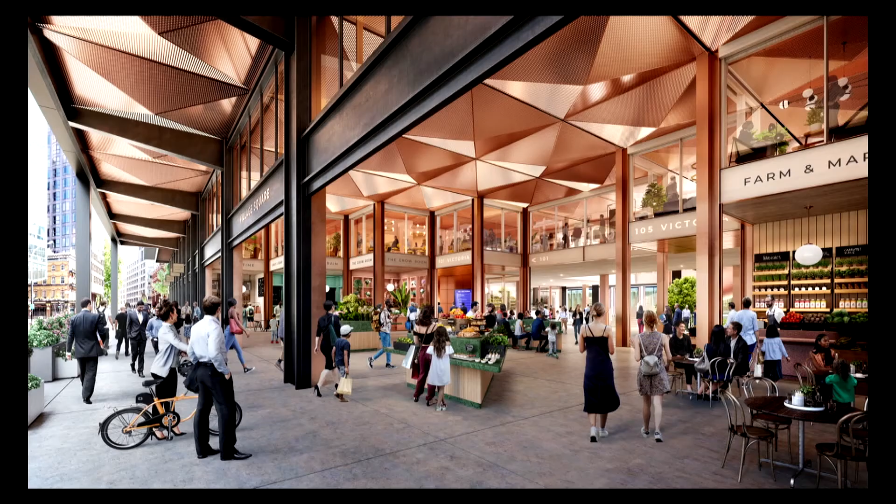This is 105 Victoria, which is going to be driving towards a carbon neutral building. I'm showing this because it is very much designed between London and New York, with senior and junior people on both sides of the Atlantic. It is really quite difficult sometimes to get to this level of quality if you're not in one room together. So how can we look at the future and how can we make that go forward?

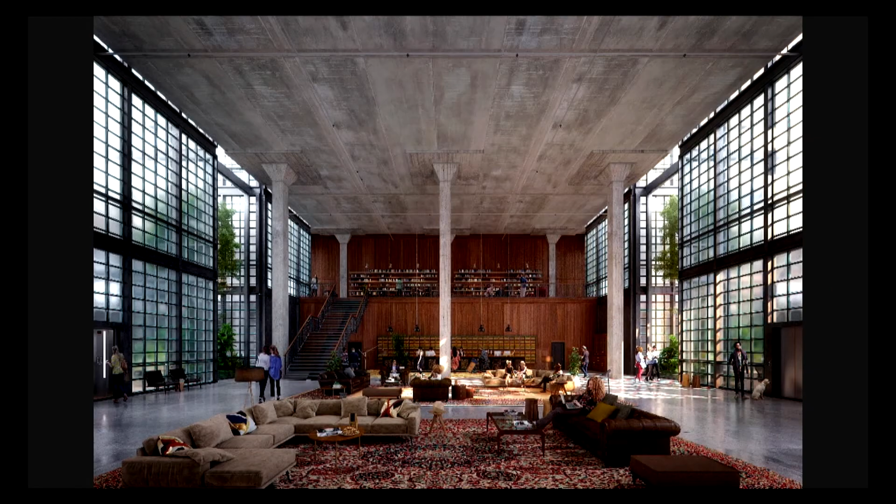Another project here, Bermondsey, recently received a MIPIM award. Same kind of concept - a collaborative design process with multiple people from all over the world involved. And again, going into details and looking at the detail aspects of those buildings, recycling the buildings and the likes.

A little bit about the back end of what we've done over the last 20 years regarding technology at KPF. I just want to highlight 2 items. Around 2003, we became a global company as such - we have 9 offices, but we really work across the globe as one network, so we dial an extension and speak to someone in Hong Kong, for example. The other aspect is around 2010, where we started disintegrating or disbanding our specialty groups and put the focus on the designers. So whatever we do, we're trying to get to a designer's table or a designer's desk as such. This is very much what I'll be talking about as well.

I love visualization, so a little bit about some of the visualization we've been doing - you can see from a technology point of view, sort of 2018 onwards, when things started ramping up on that aspect.

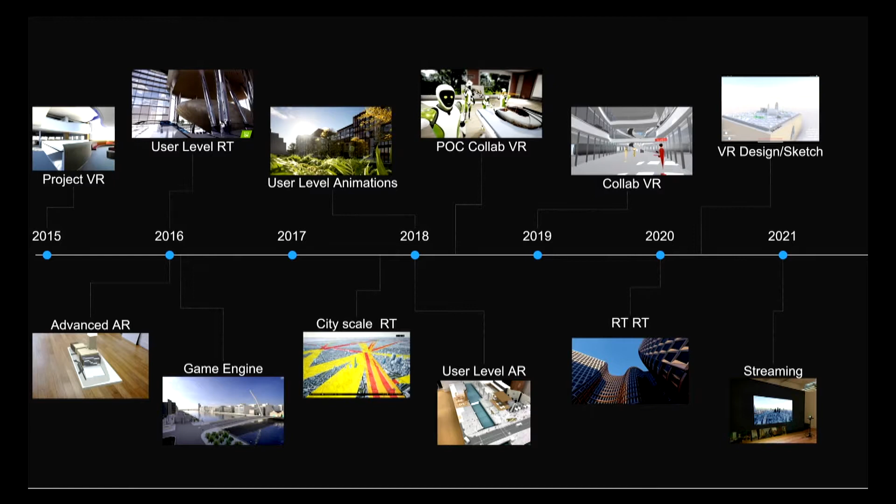Just a bit more - our technology group globally is about 45 people. It spans different disciplines: infrastructure, digital practice (which is the BIM, computation, visualization people), urban interface, environmental performance, data science, and then I sit in applied research. We really work across the boundaries - there's not siloed entities as such, this is really a global approach to how we do it. The focus is from the outside really in towards this digital practice, UI and EP side of things to empower our users.

So today I want to talk to you a little bit about some aspects of location independent design and what we can look at towards the future possibly.

I said we have 9 offices across the world, dispersed all over, and it's quite challenging when we have to share files and the likes and be immersive. Now, of course, we have 750 plus independent small offices that we cannot control, and we cannot always control the hardware that these people are working on as well. Which brings to the aspect that we were looking at, before the pandemic, a very much global private and public cloud approach. But it was very much in file sharing and data sharing as such.

It wasn't really in terms of the compute. What has happened recently is that we have moved a lot of these functions and started building compute servers - geometry compute servers, as well as visualization compute servers. We are trying to see what we can do on the cloud side, move the compute away from where we can't always control what the user is doing, and see if we can compute in the cloud and then get the information back to the user.

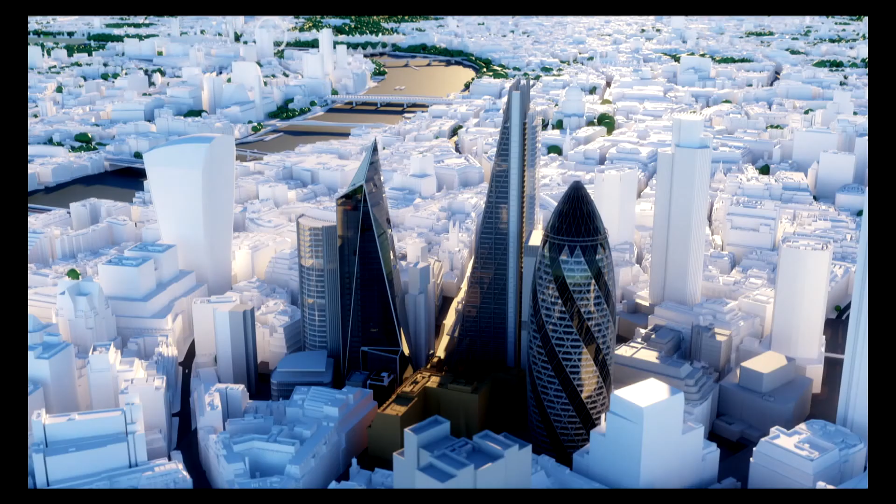So how can we get a BIM model with Rhino models and about 40 square kilometers of London at 150 mil accuracy in front of a user where we can't control the hardware? That is the kind of spot challenge. And can we have that running live with them when they make changes?

They can actually get the visualization live out of that. This, incidentally, is running path traced, so it's not a rasterized rendering or any optimized rendering. There's no time spent optimizing this model, and I'll delve into that a little bit.

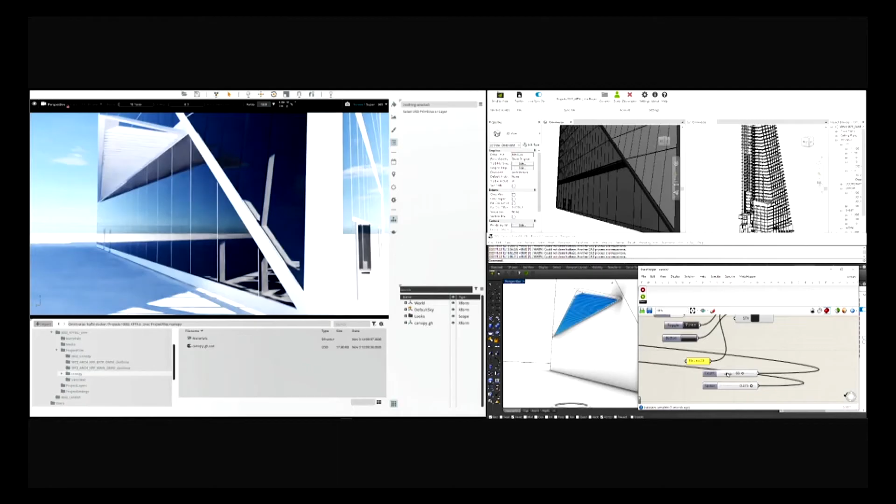One of the applications we're looking at, like a few others, is Omniverse. This is one of the ways we're doing it, definitely not the only way, where we can have two Revit models open and a Rhino model feeding a central visualization model to the users. This requires some backend setup, and this deals both with remote compute in terms of geometry, as well as remote compute regarding visualization.

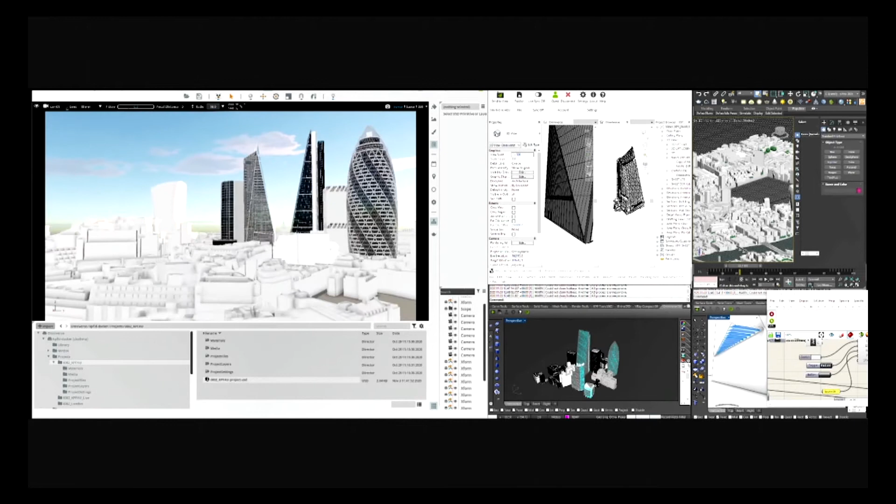It is not a small model. This is probably capping out this 24 gig graphics card, but you can see the entities are pretty real time, running pretty live. The instances on the right are on a different machine to the ones on the left. I've just cropped them together to show you the kind of quality you can get.

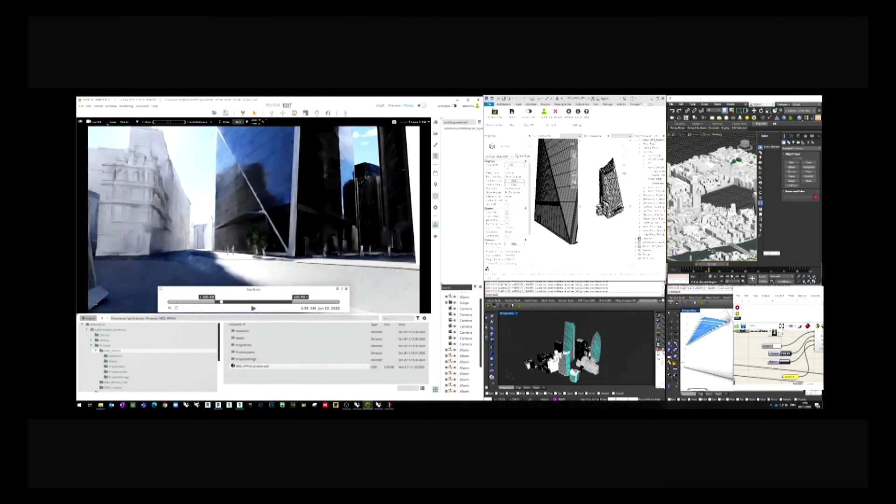This is really what we're aiming for. Again, this is a BIM model at DD phase where the user can open this and visualize it in really high fidelity and high quality.

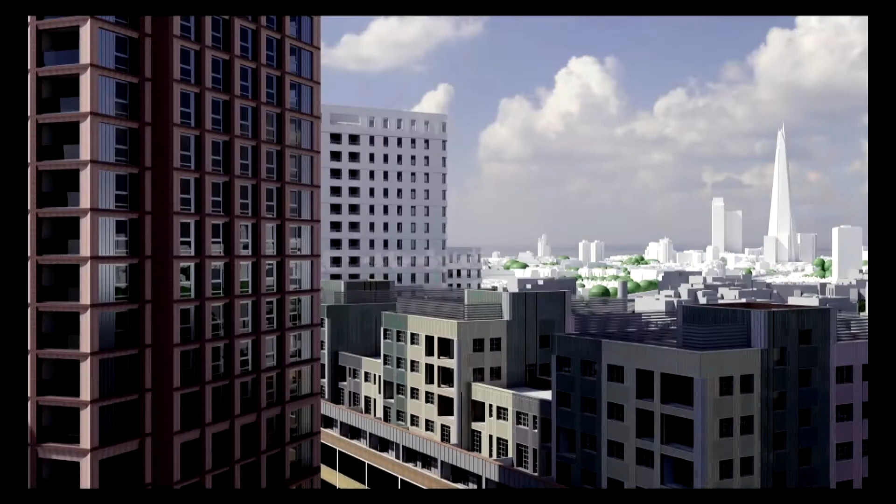And then more recently what we've done, there's again three multi-BIM models — I'll talk about three or four Revit models put together, no optimization — and this is a direct feedback from the Revit models that we can feed to the user wherever they are in the world.

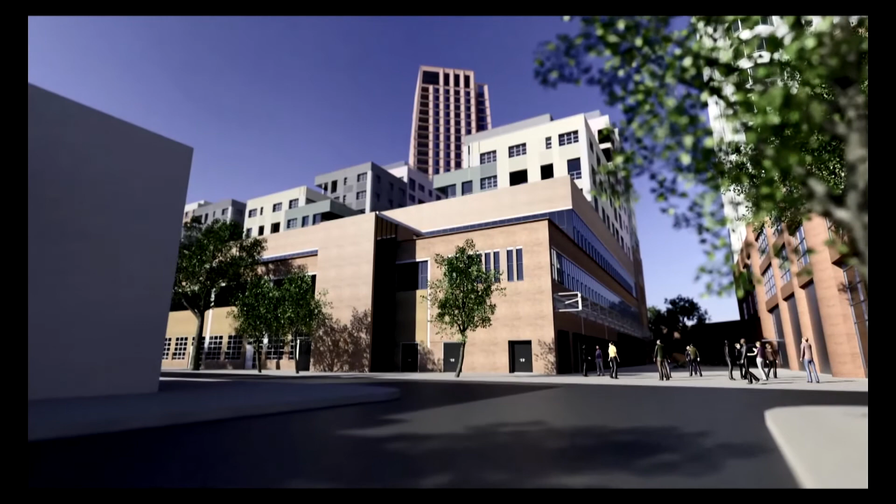These are animated. I just put parts in there, but this is what you're going to get. If the user decides to add another floor, they can see it happening in semi-real time, depending on internet availability.

These Revit models, by the way, are level 2 full COBie BIM models. Don't ask me about that, I don't play in that field anymore.

So how can we go a little further, and how can we start bringing analysis data across to the users, getting immersion going? A project we recently did was an office design study, where we looked closely at the floor plans, how to disperse people coming out of the lifts so they don't gather and walk the same route, and how to create quiet zones, busy zones, interactive zones, and fixed static zones.

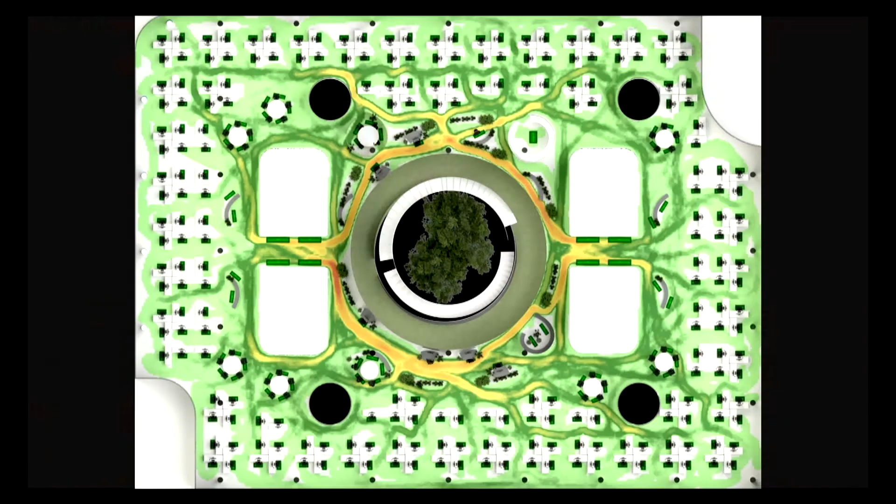So we generate these kinds of images for them, running analysis as such. I'll show you two examples now: pedestrian agent-based analysis and CFD, because I like them. But the analysis runs separately, not live at the moment—I'll show you some of the live stuff we are running. It does give us the quality and ability to give more feedback to these models in semi-real time.

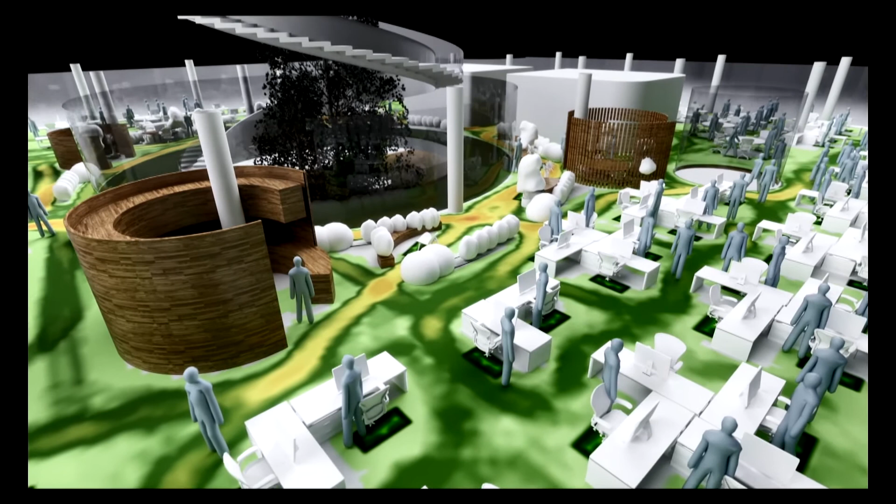So we generate these analyses and stream the data directly to the live model for the users, which is what happened here. The assembly of these models are multi-model assemblies, so you only affect the part you actually want to—it doesn't have to be one single model being streamed.

One of the other things we're doing—the compute of the CFD may run anywhere from 3 to 12 hours depending on what happens. But once the compute is done, we can stream the post-processing, the visualization side of the compute, directly into the model.

We can combine this with various types of models. So in a case like this, One Crown Place here in London, we have the full BIM model and we're showing the client how we can stream the CFD around it. Of course it's not computed on the BIM model itself, it's computed on a simplified model, but it gives an indication and a more realistic idea of what the wind is doing.

What you also have there is a layer underneath, a cut underneath, based on predictive CFD using a machine learning algorithm, and that runs live from the server side, not from the client side.

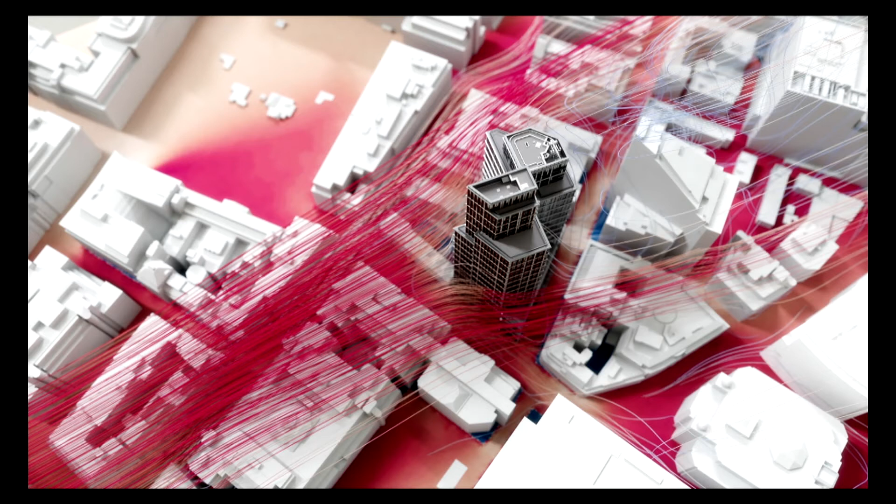I'll show you quickly a video where you can adjust a single massing or simplified massing. The user doesn't have to see the grasshopper side—I just had it there because I had to switch functions on and off for the capturing. On the right-hand side, you'll see this is actually streamed through a browser, not running on any application. This is what we're talking about when we talk about streaming.

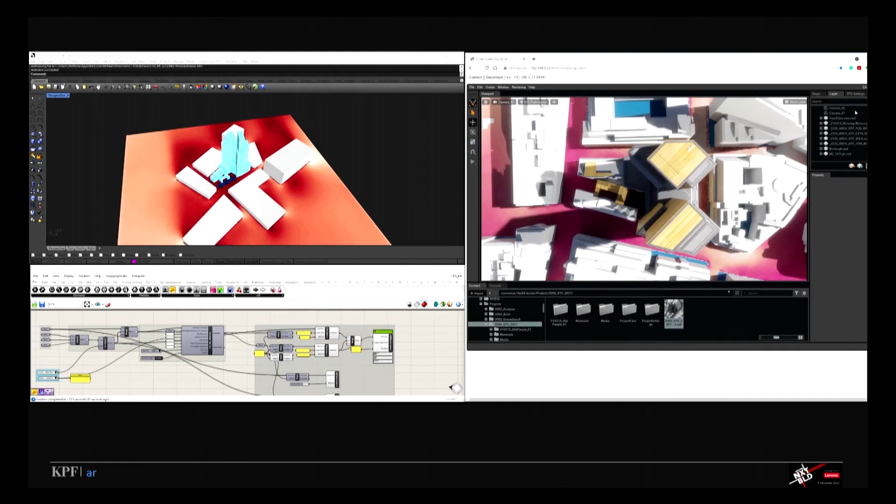So the user might adjust some parameters on the left-hand side—the height of the cut, the location of the massing—and on the right-hand side, through a browser, they'll be streaming a path-traced image back of that. That path-traced image has the full Revit model included, not block models.

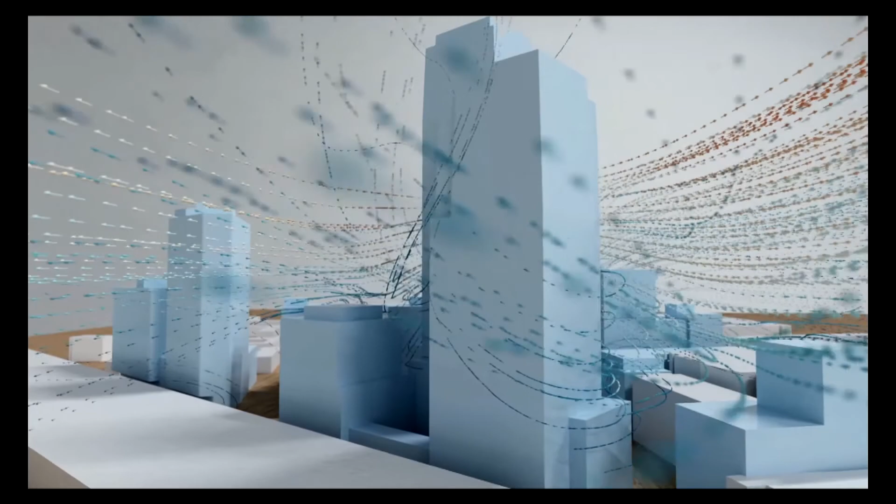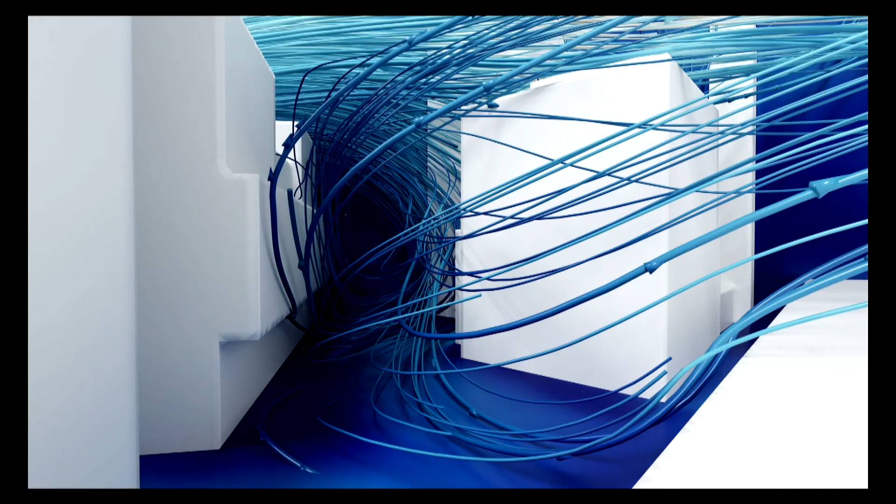It really allows for a bit of eye candy when you want to go into it, where you can start streaming this without any input—no optimization, nothing that needs to be done to it. If I go and change the display or the cuts of the CFD, I'll see it live running, and it's better to look at it for the designers in a way.

Metric data and diagrammatic data are very important for them to read, but it's also important for them to see visuals and actually understand what the wind will be doing in a specific area—in this case, forcing a downdraft—so they can immediately see that and react to it. And again, this is semi-real time, running in a semi-real-time environment.

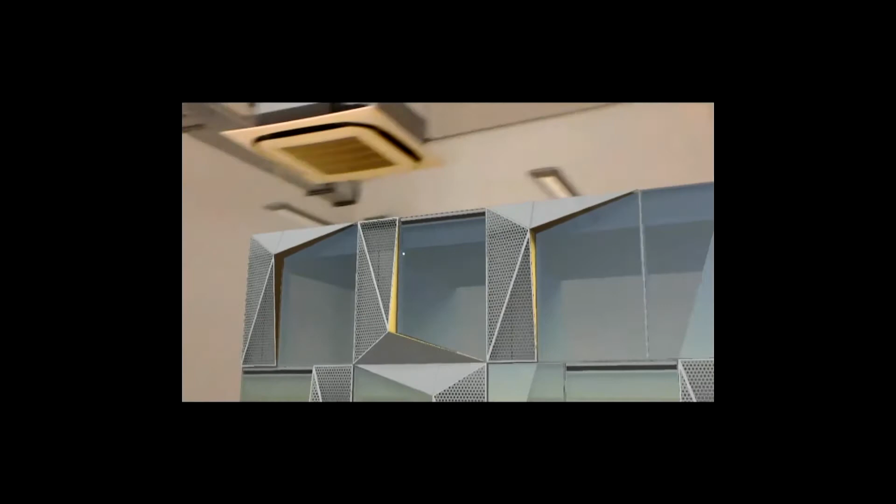We built many of these, and we've had many high-level people, CEOs, have augmented reality headsets on their heads as opposed to VR headsets. They are more comfortable doing that. In this case, we really wanted to show the apertures and the facade all modeled, but it took a day or two to turn around this model, and it had to be deployed, whether remotely or not, on a piece of hardware.

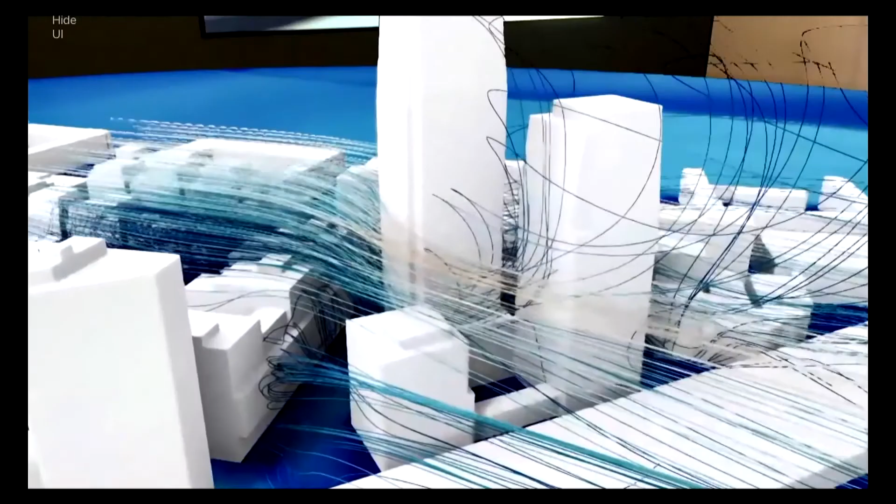So pretty recently, what we're looking at is running the same thing without any predefined compute and streaming it at path trace quality to remote devices. Here we have an iPad that runs an augmented reality model of that CFD that I showed earlier, streaming from a remote server. The remote server does the compute side and streams it to the iPad. And this is available out there. It's doable, it's just a matter of connecting the dots.

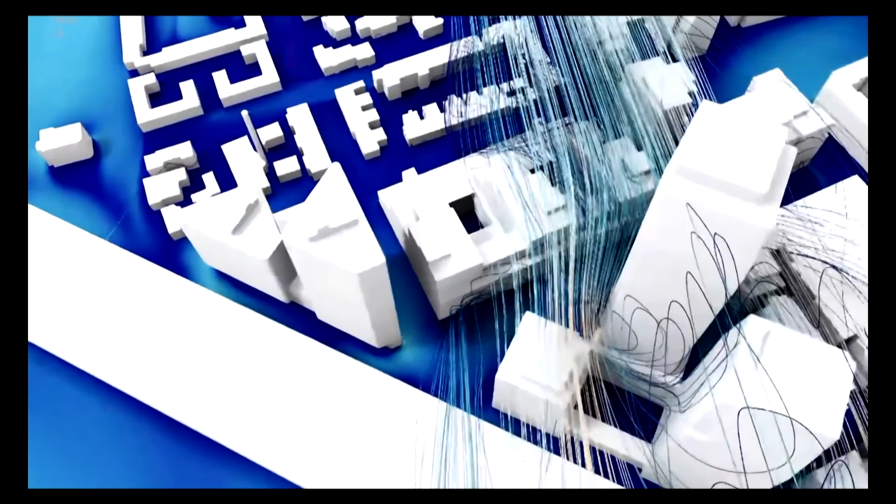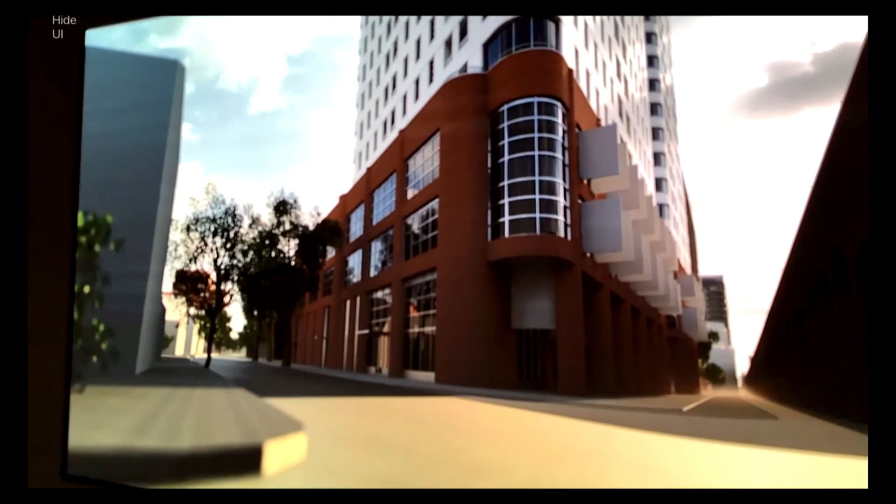We're really looking at, for lack of a better way, augmenting 2D presentations with 3D interaction in front of this presentation, where we can discuss the visual and understand what's happening in certain parts of the building and certain parts of the project, and then review it in full 3D with natural interaction with that augmented model.

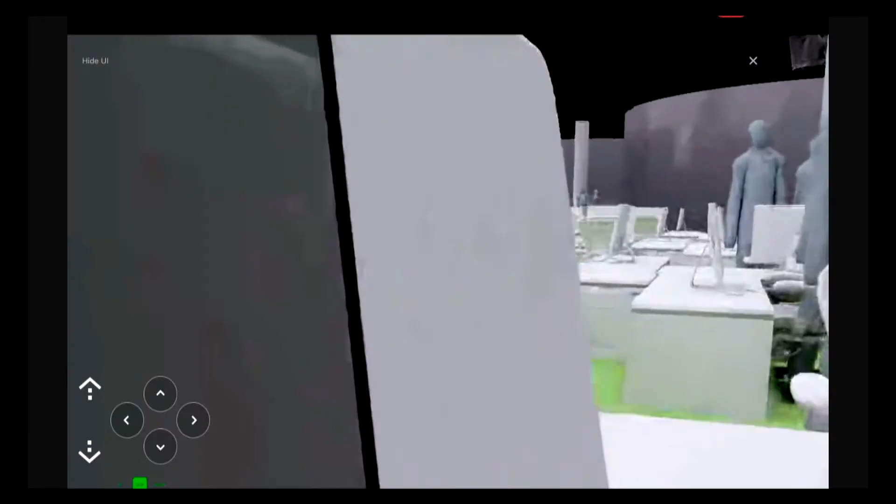And then this video, this is where we're driving it towards a one-to-one approach. So here I am one-to-one looking at the previous model that I showed you and actually walking around it, understanding the agent or the density of the office. I can actually walk around the office as I want to from the tablet or from the headset and get an idea.

This is where my kids were really watching Mr. Beast on YouTube, so apologies for the capture on that.

But there's a lot of promise behind this, and this is what's exciting about what we're doing now. This is where we can look at this in real time, and we can say, well, can we change the desk layout and see it immediately without any changes? Not something that's pre-computed, not an option that's been designed, not an option that's been done the last week or two by a designer, but really a real-time change to it.

The Grasshopper side of that, in the cases I showed before, accesses two things: it accesses a compute running on a remote server, and it accesses the data center, which is a data server actually sitting in New York as well. So the machine learning compute was running on a remote server as well.

And those are both streamed back into, in this case, a Rhino file. The geometry from there is then synced with a data server, which is Nucleus in this case, and that is then streamed back to the visualization server. The visualization server in turn streams that visualization back to the thin client, to the user, through WebRTC or something similar, down to the tablet or lightweight device they're looking at.

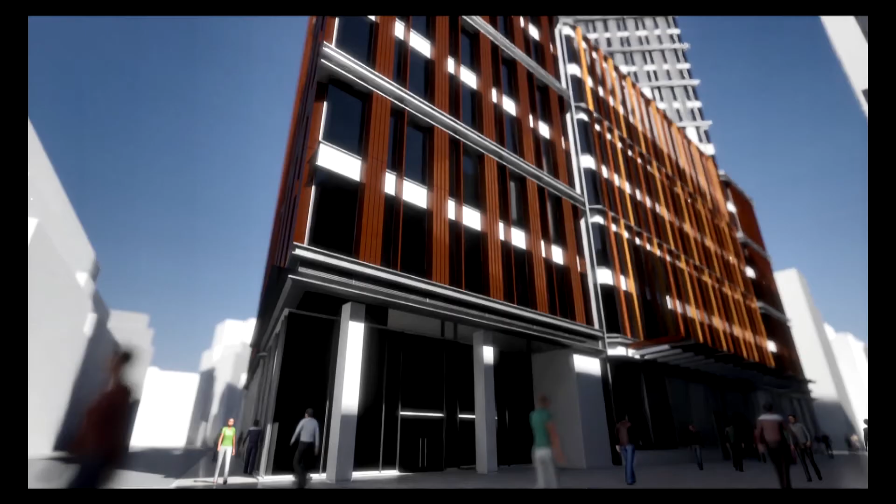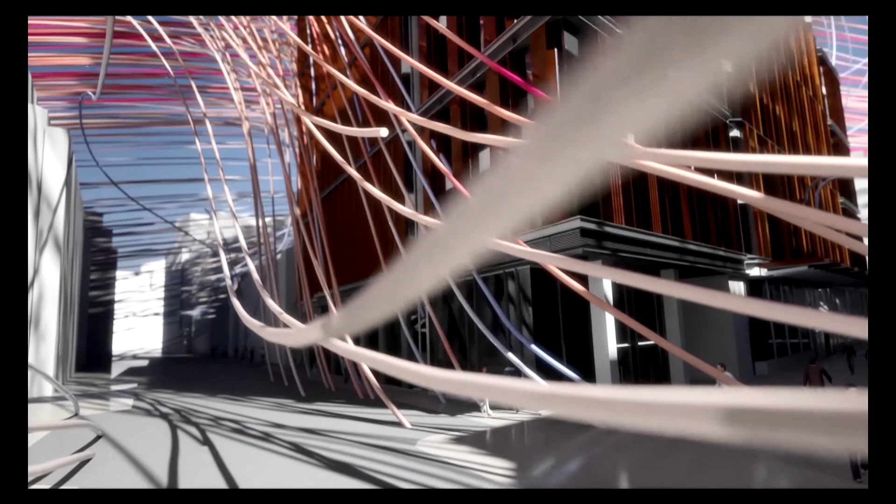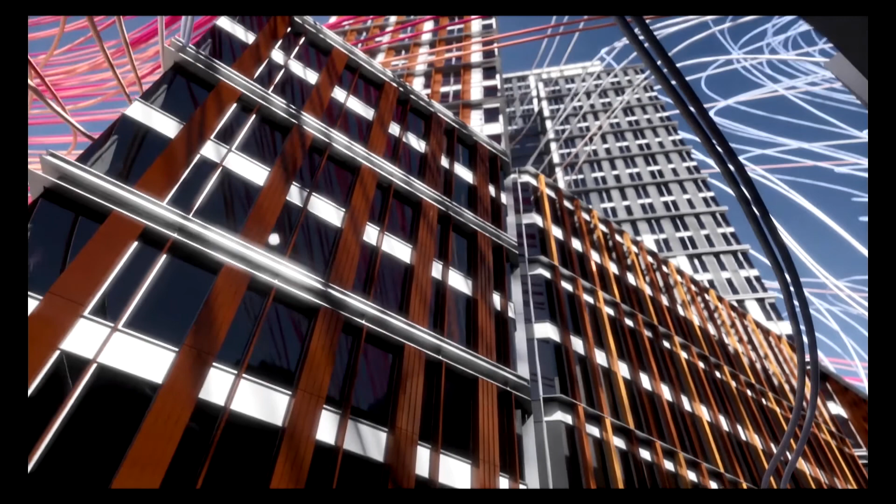And of course we are pushing, and this is also not 100% new, but we really are pushing into a space where this is simulated, but a space where we can be on site or in location with the buildings in full spec without optimization, not necessarily doing live changes because I don't think that's useful, but also overlaying all the data and analysis that goes along with the building to understand noise levels, because we can simulate that and show it, understand wind situations, daylight factors, and the likes. This is probably where we will be going in the future for remote immersive design.

And that is me. Thank you.